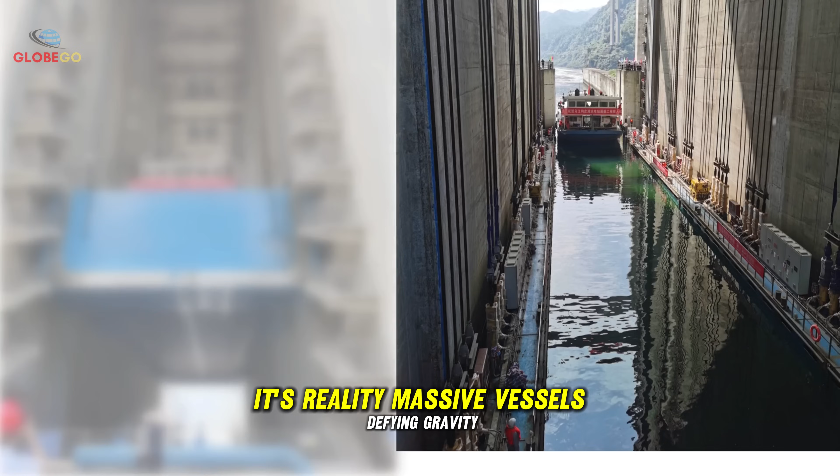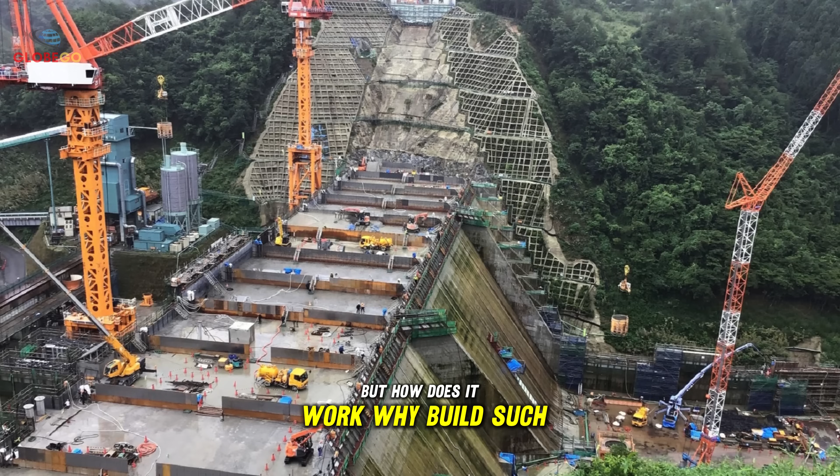What if ships could climb mountains? In one corner of China, that's not science fiction, it's reality. Massive vessels defying gravity rise hundreds of feet into the air, as if water itself flows uphill. But how does it work? Why build such a system? And what hidden technology makes the impossible possible? Let's explore. But before ships can climb mountains, we have to understand why China is uniquely positioned to make such feats possible.

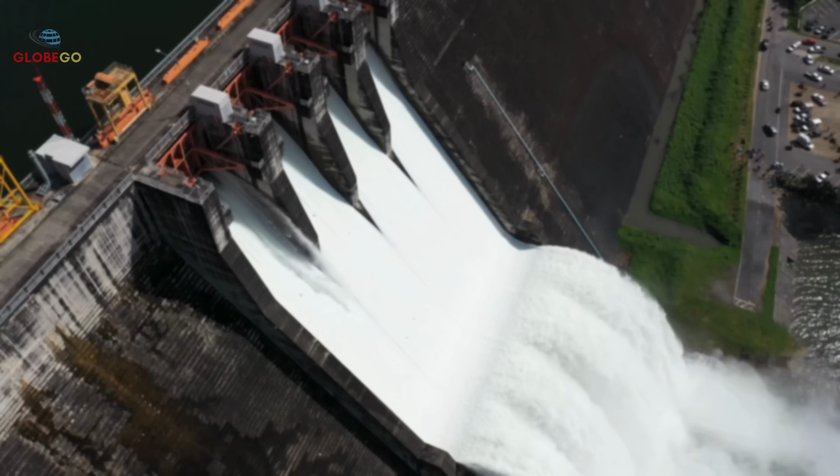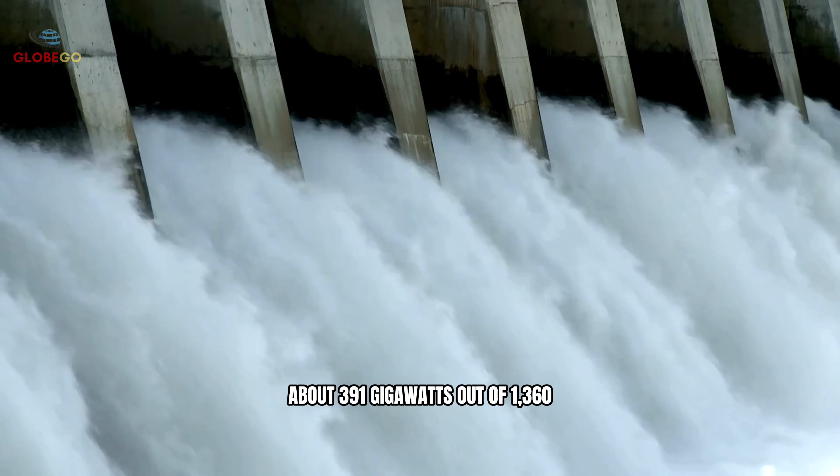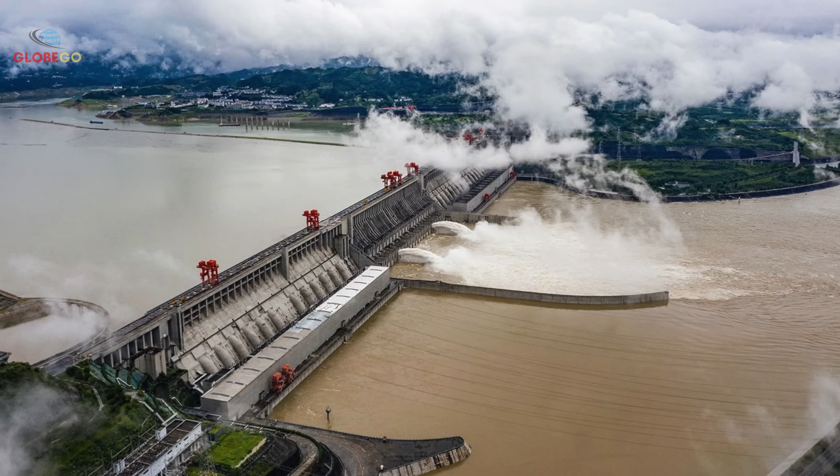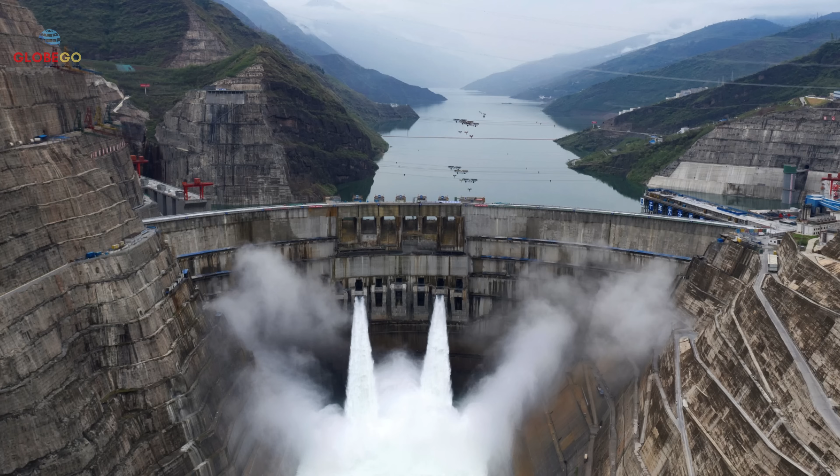In China, water is stacked, channeled, and pushed over mountains. It leads the world in hydropower, producing nearly 1/3 of global capacity, about 391 gigawatts out of 1,360. At the center of this power is the Three Gorges Dam, the largest hydropower station on Earth, generating 22.5 gigawatts. It spans the Yangtze River like a modern Great Wall, turning massive water force into energy. Close behind is the Beihetan Dam, the second largest in the world. The 5 biggest hydro stations are all in China.

But China isn't just building dams. It's transforming rivers into transport routes. Engineers are creating staircases that let ships float over mountains. This once seemed like science fiction, but it's real, and it's changing how goods, people, and energy move. China is not just building for today. It's shaping a future where mountains become ship highways and rivers power the nation.

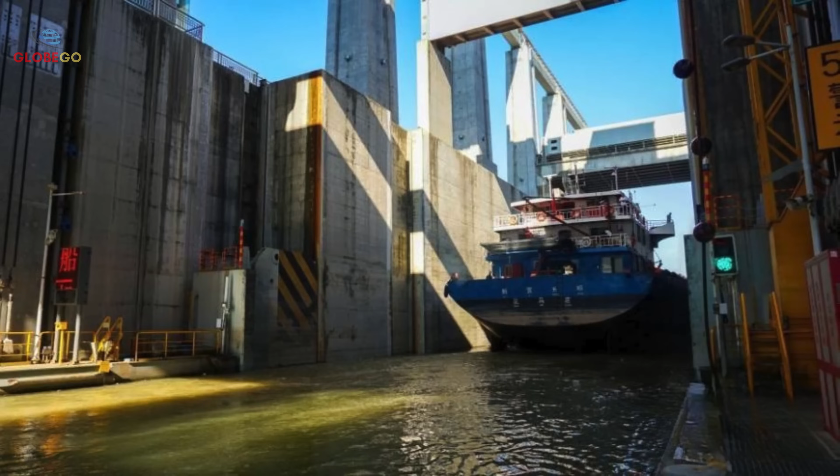So how exactly do ships rise through the mountains? The secret lies in an engineering breakthrough that looks straight out of a sci-fi film.

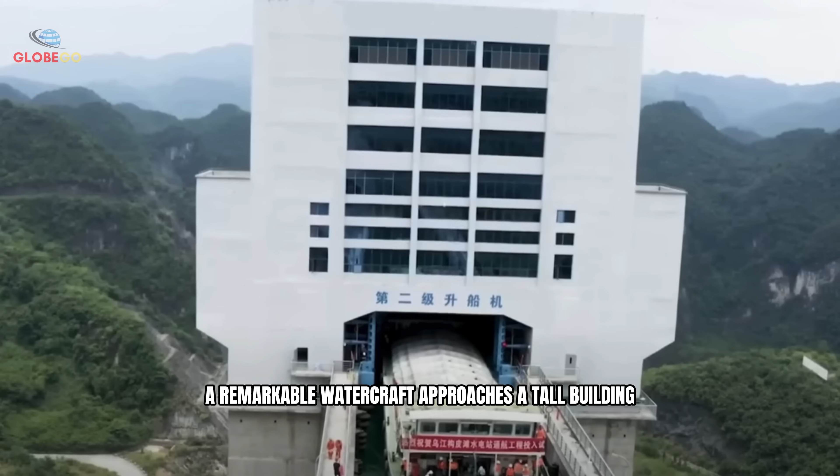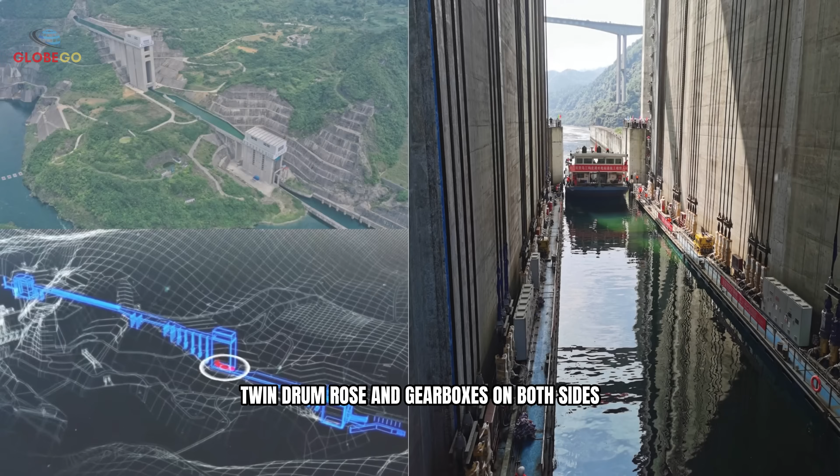Not far from the Goupitan Dam in China's Guizhou province, a remarkable watercraft approaches a tall building and enters it. While it may appear simple, the mechanism inside is complex, featuring a lift cable, twin drum rows, and gearboxes. On both sides, it functions much like an elevator in a high-rise building. Though the process might seem slow due to the scale and machinery involved, the system is highly efficient.

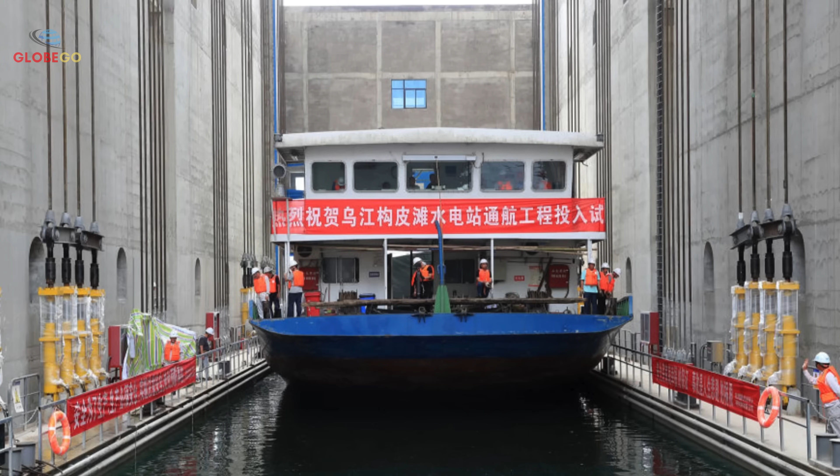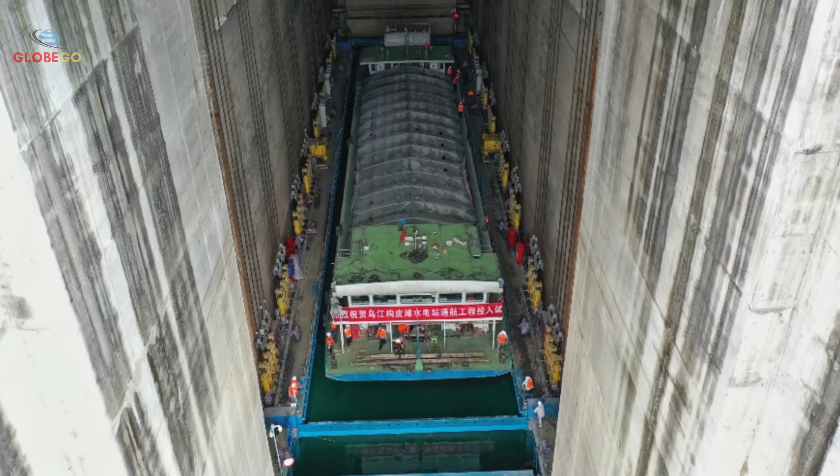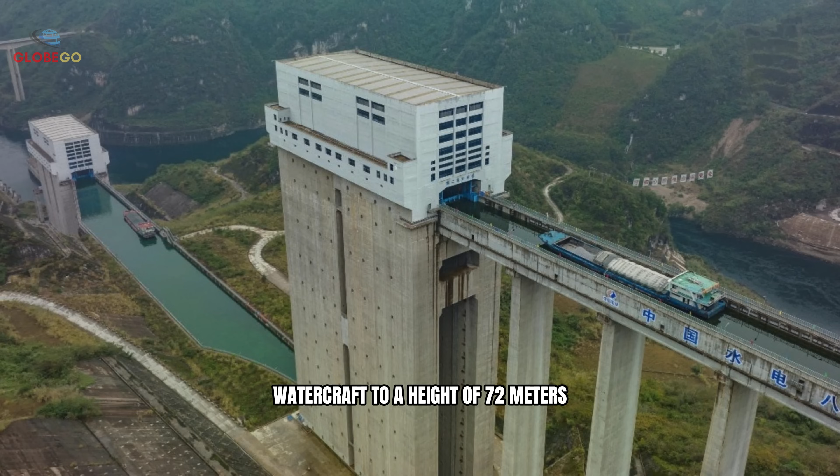According to its designers, the lift can raise or lower a 500-ton ship in about 10 minutes. In other words, a standard passenger ship can be elevated from its starting position in just minutes. The lift's maximum capacity is 1,800 tons, although heavier vessels take more time to move. Still, few would mind. This structure can lift watercraft to a height of 72 meters, depending on the water level. To put it in perspective, that's roughly the height of a 20-story building, an impressive engineering achievement by any standard.

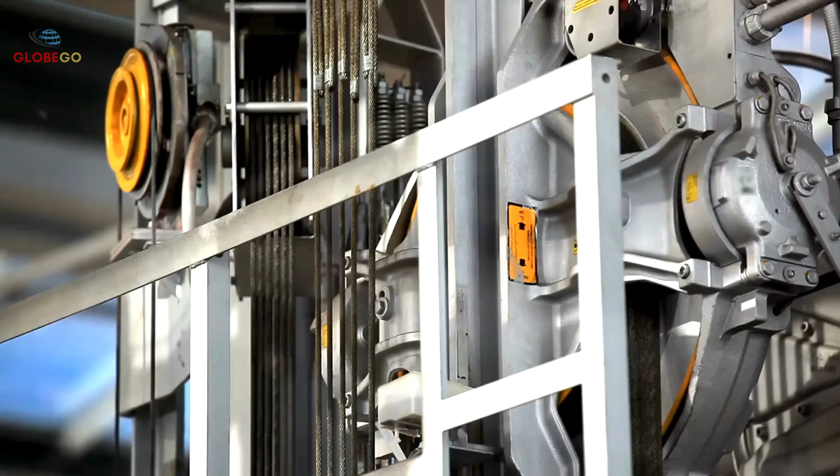But lifting ships once wasn't enough. What if a single lift couldn't do the job? That's where things get even more extraordinary.

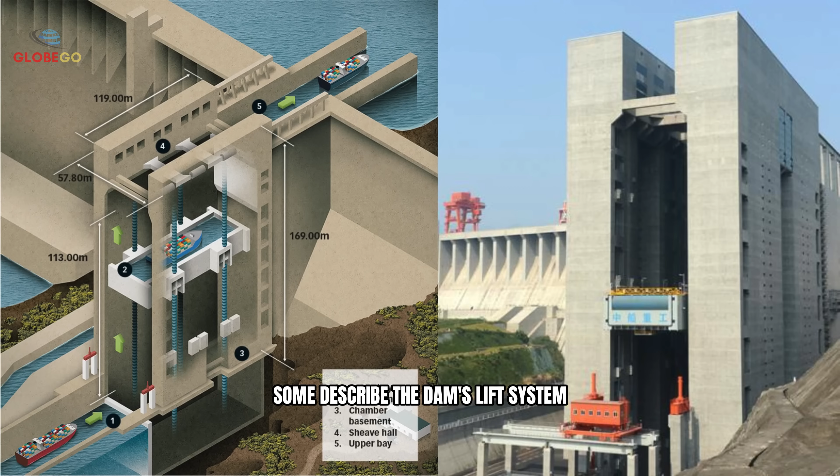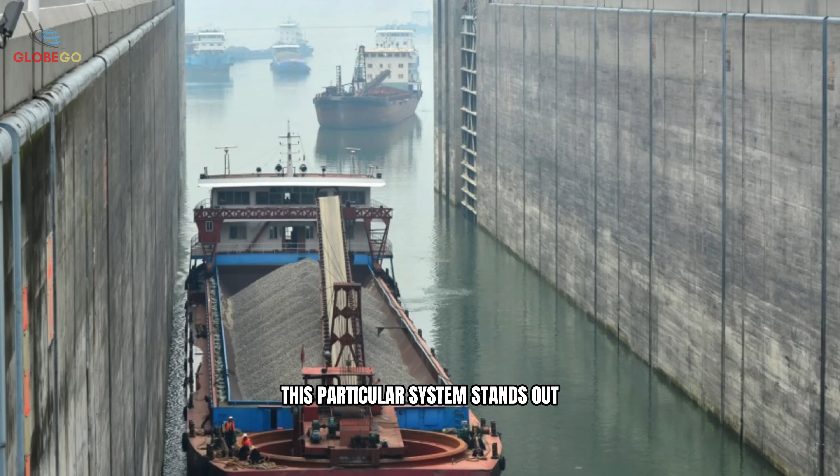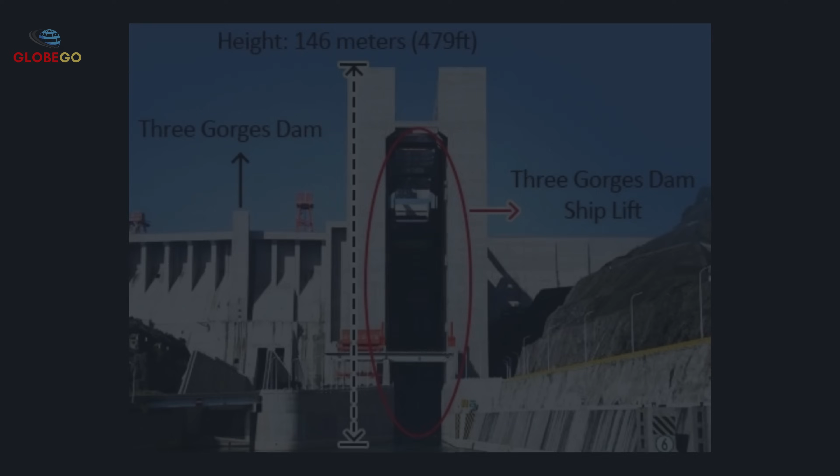Some describe the dam's lift system as a remarkable feat of engineering or even a modern marvel. While boat lifts have existed in different forms worldwide for years, this particular system stands out because it includes not just one, but 3 lifts. After the first lift, a second one raises vessels even higher, up to 127 meters. The mechanism is similar throughout. Ships float in, wait for the system to engage, and are then lifted by the dam's elevator system.

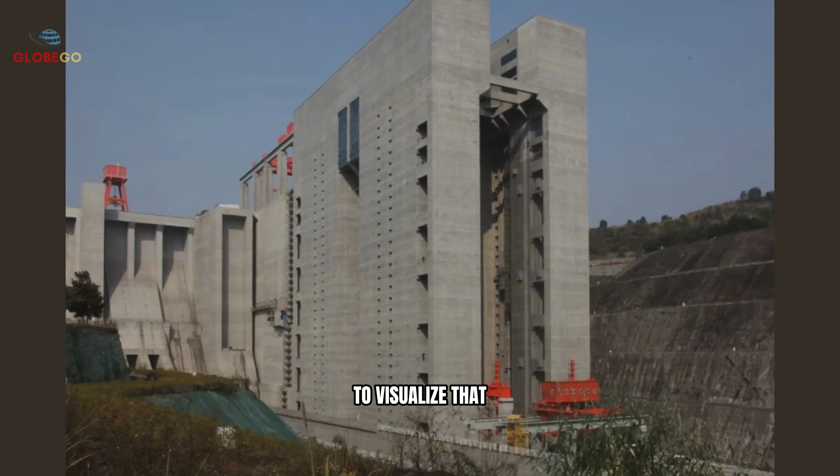Altogether, the watercraft rises a total of 199 meters. To visualize that, it's roughly the height of a 60-story building. That's well above iconic landmarks like the Great Pyramid of Giza, which stands at 139 meters, and even the Statue of Liberty, which is much shorter by comparison.

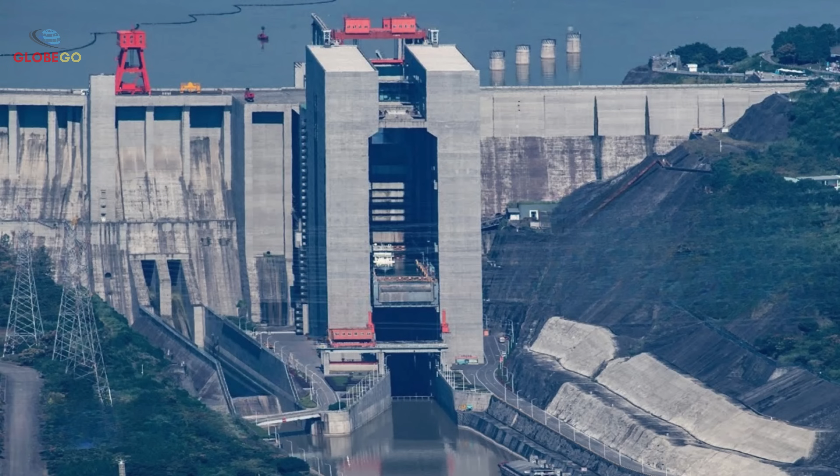After climbing the first 2 lifts, ships need to descend again to reach the water behind the dam. The system includes a final lift that lowers vessels by as much as 47 meters, depending on the water level.

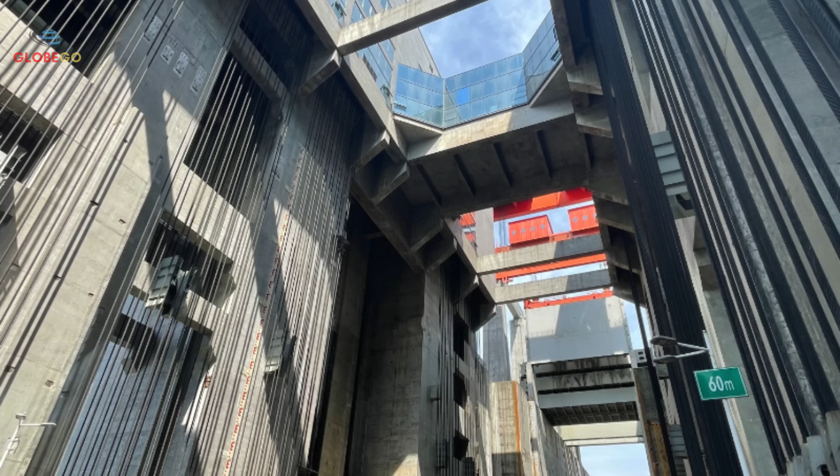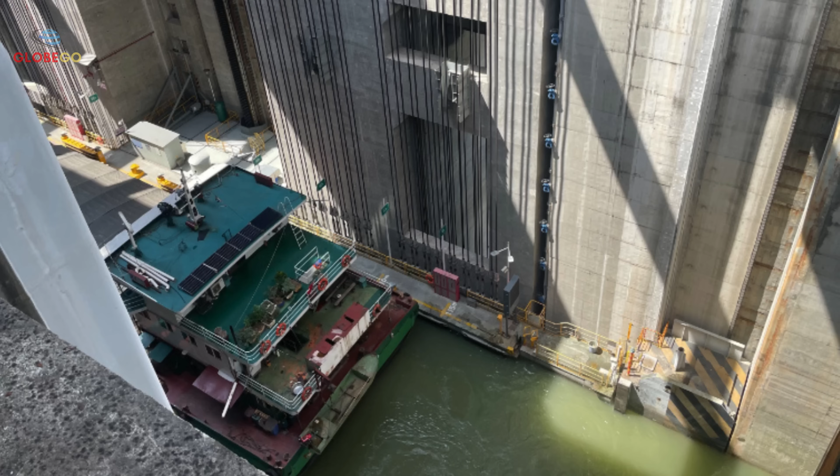Admittedly, this setup may not match the speed or flexibility of open river navigation. Only one boat can be lifted at a time, unlike free-flowing rivers where multiple watercraft can travel simultaneously. Still, the system allows for an efficient flow. As one vessel completes its lift, another can immediately follow. It's not a perfect substitute for open water routes, but engineers have optimized it as much as possible to keep traffic moving along this innovative passage.

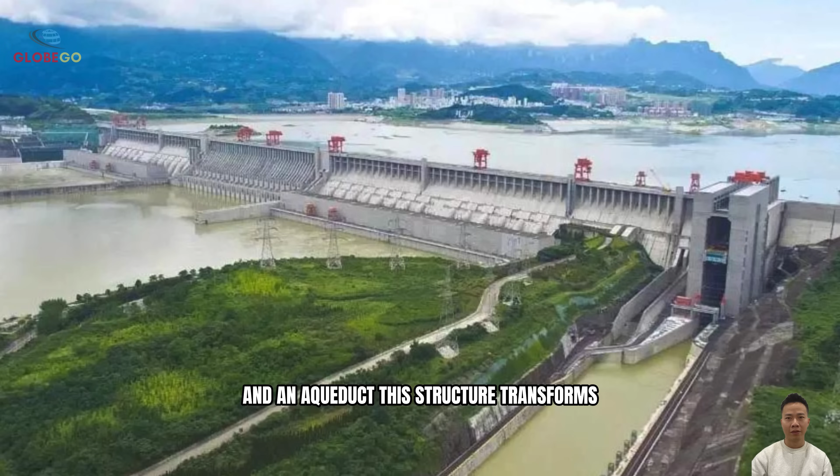Thanks to the combination of 3 lifts and an aqueduct, this structure transforms complex terrain into a manageable route, an impressive accomplishment in modern Chinese engineering. Now you might wonder, how do you link multiple lifts across rugged terrain without slowing everything down?

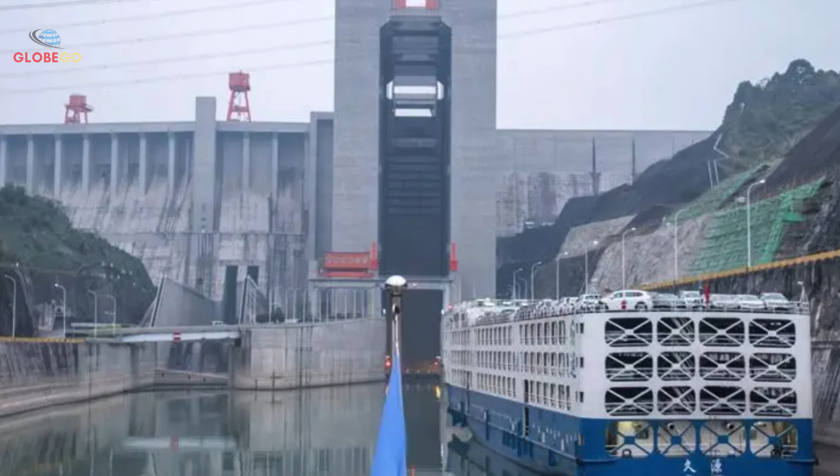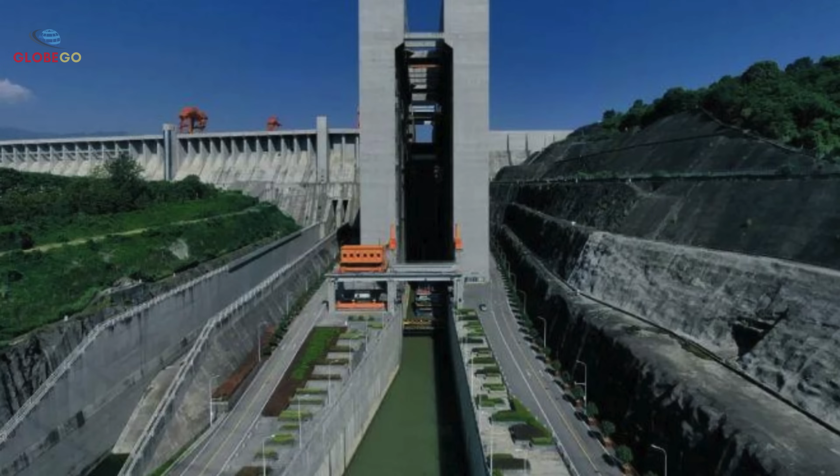However, there's a section between the lifts that had to be addressed. In many traditional waterway systems, this would typically be managed using locks. Locks help ships transition gradually between different heights without needing to scale mountainous terrain. With a series of locks, vessels can slowly rise or descend from one level to the next with minimal added infrastructure.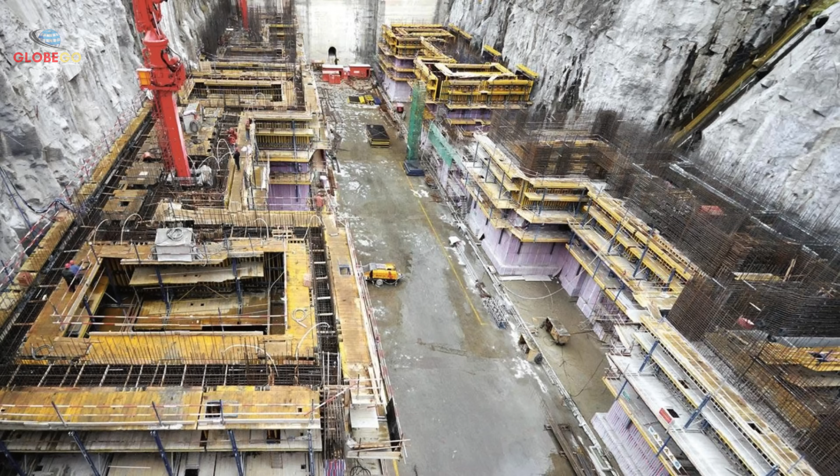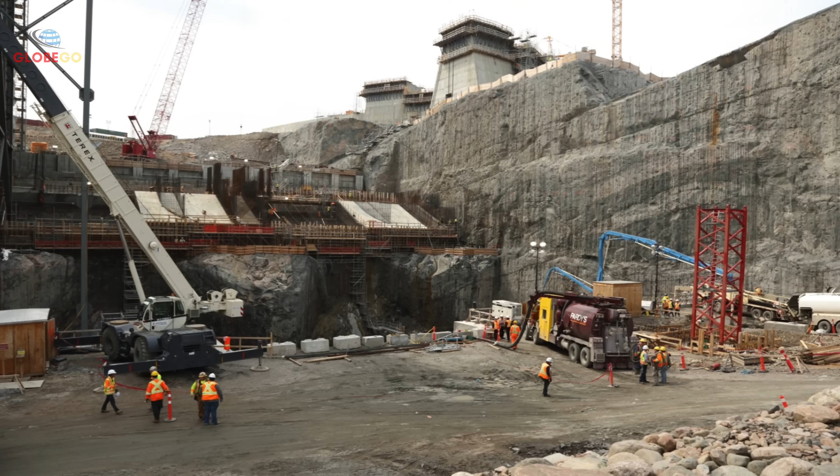But in this case, using locks alone wasn't feasible. Instead, engineers had to build a connection between the 3 lift systems. The solution was to construct an open aqueduct linking the lifts through mountainous terrain. While aqueducts have existed since ancient times, integrating one into a modern mountain shipping route required sophisticated planning and engineering. The lift system itself posed more challenges, but Chinese engineers handled it expertly. They completed a second segment of the route through the mountain by constructing a tunnel using advanced tunnel boring machines.

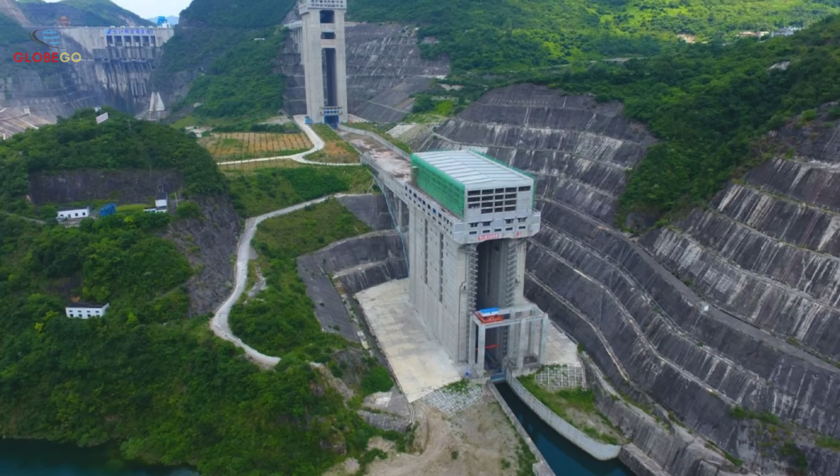The result is a continuous waterway that includes a 2.3-kilometer tunnel inside the mountain. The entire system cost approximately $777.5 million to complete. Now ships can safely and efficiently pass through this complex terrain, something that would have been far more difficult using

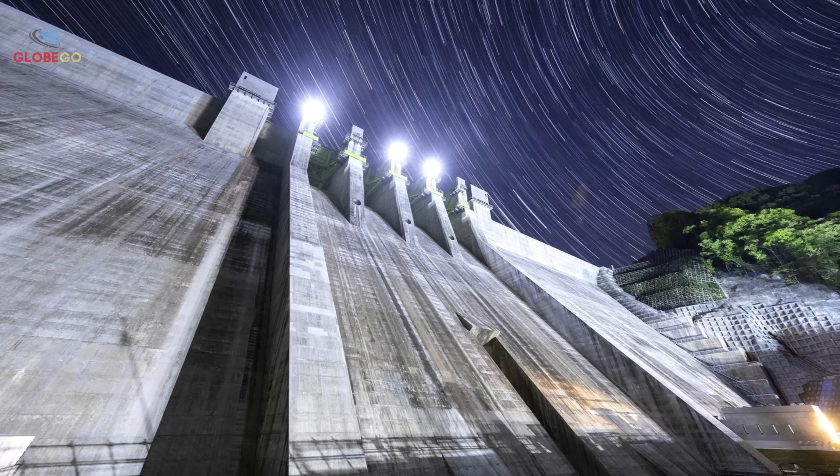only conventional methods. This innovative route was largely developed to support the Goupitan Dam project, which began construction in 2003 and has since become a major infrastructure feature in the area. Its most notable characteristic is that it's an arch dam, a structure known for strength and efficiency in mountainous settings.

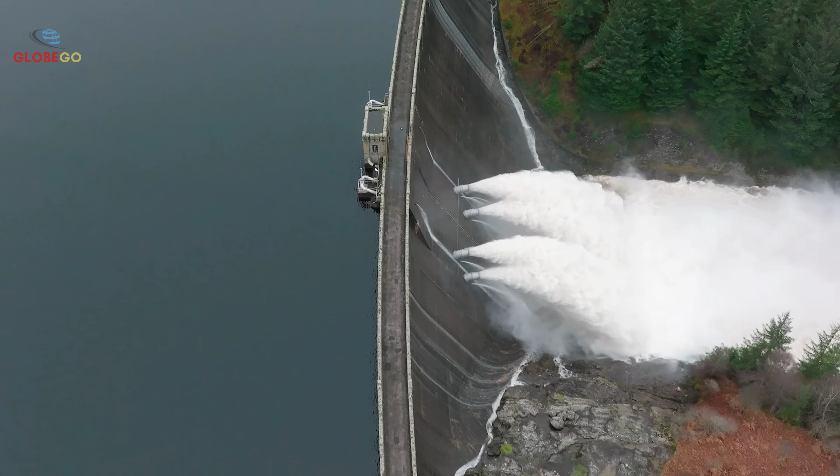But why go to such lengths? Was it just for convenience, or was the terrain too extreme to allow any other option?

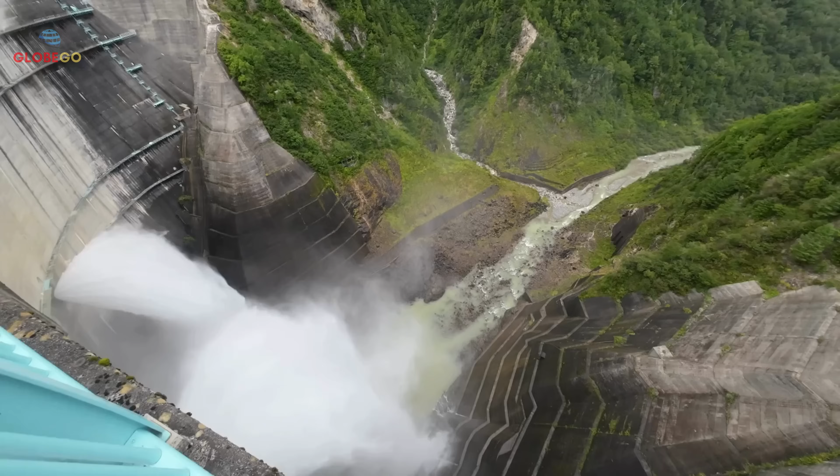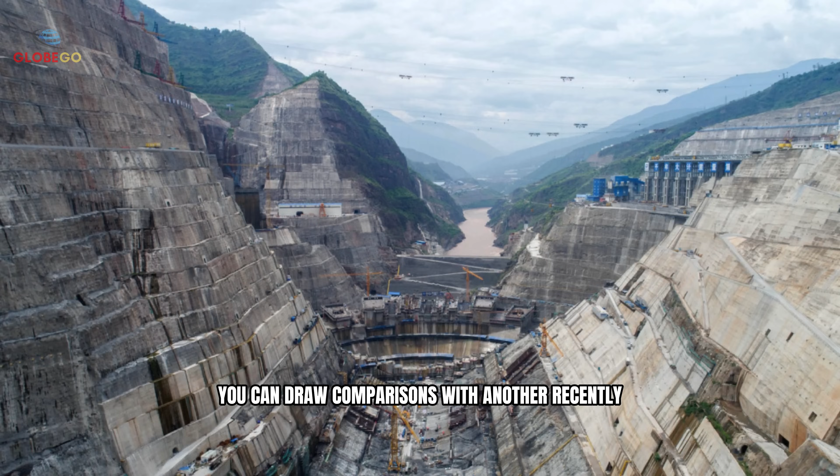You can draw comparisons with another recently built Chinese dam, the Baihetan, which shares a similar shape and is located in a comparable region. However, today's focus is on a smaller dam.

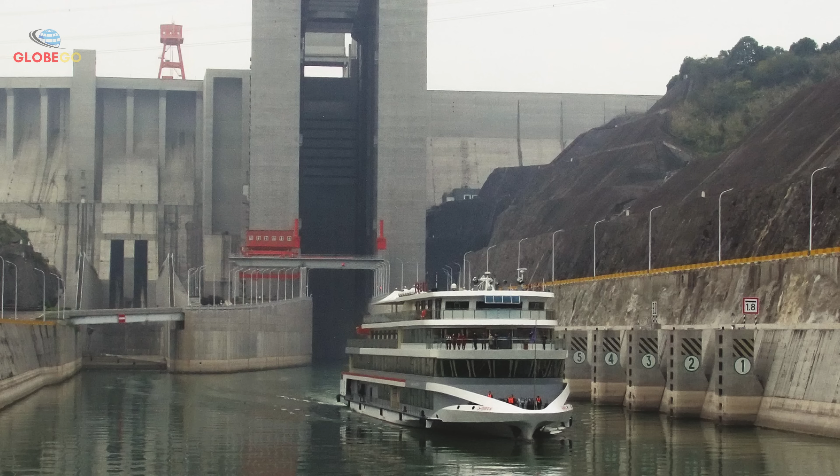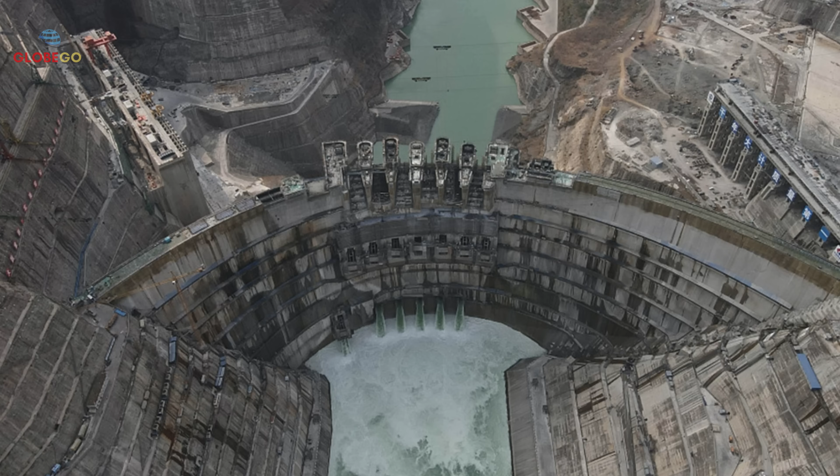This structure, featuring a unique navigation system, stands at 232.5 meters tall and spans 557.1 meters in length. In contrast, Baihetan reaches 289 meters in height and stretches 709 meters.

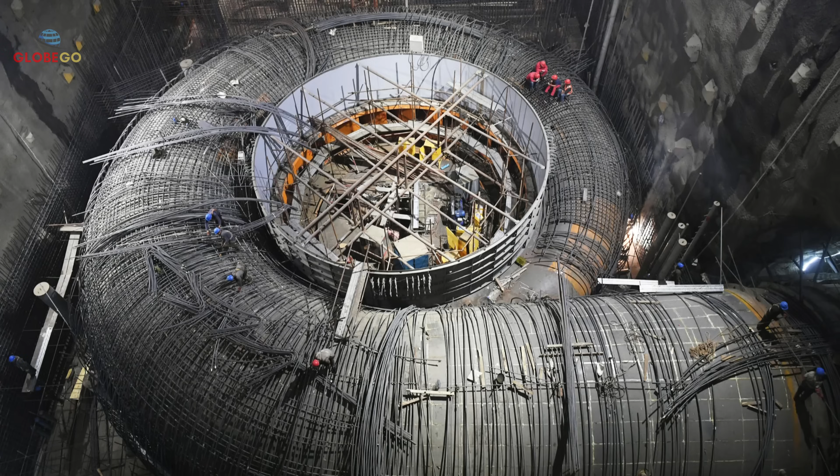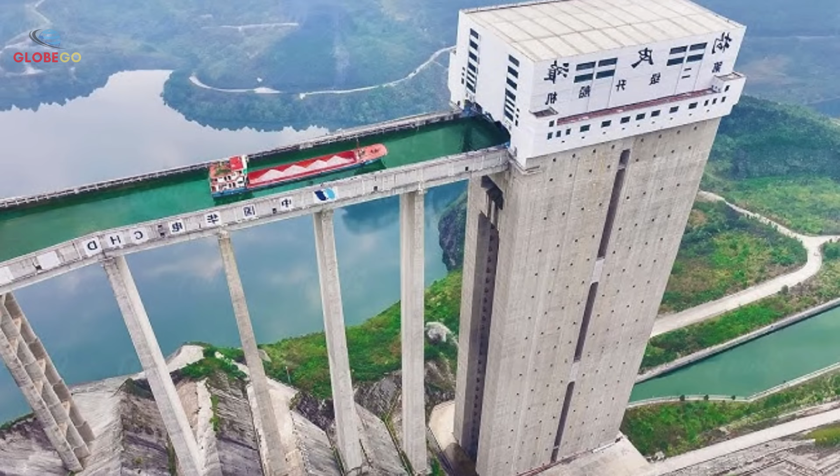Overall, these facilities may not be globally remarkable in terms of size or output, but the navigation system that allows boats to pass through mountainous terrain remains a notable innovation. This leads to the question: why invest so much time, effort, and funding into a project that doesn't stand out for its energy output alone?

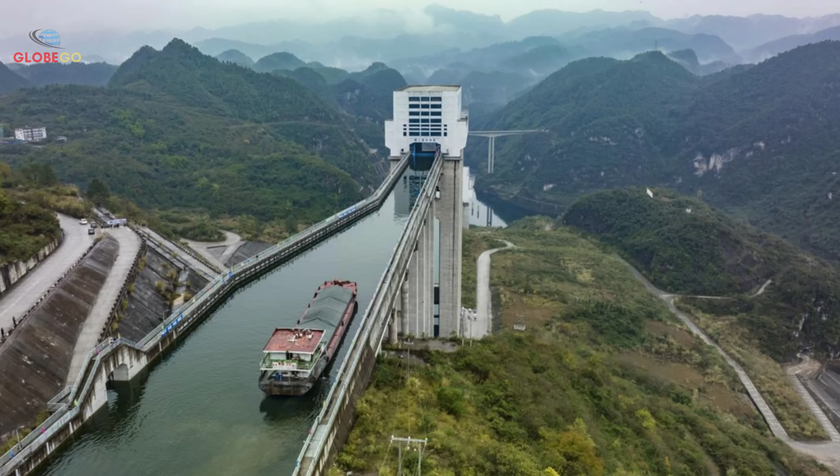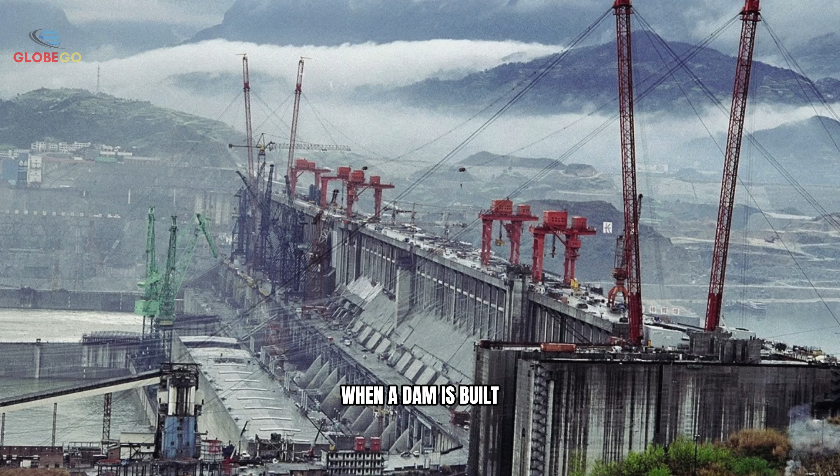A key reason lies in the dam's challenging geography. The site is so constrained and rugged that a traditional lock system was not feasible. When a dam is built, it naturally alters the river's flow, raising water levels on one side while restricting flow on the other. This creates a distinct height difference.

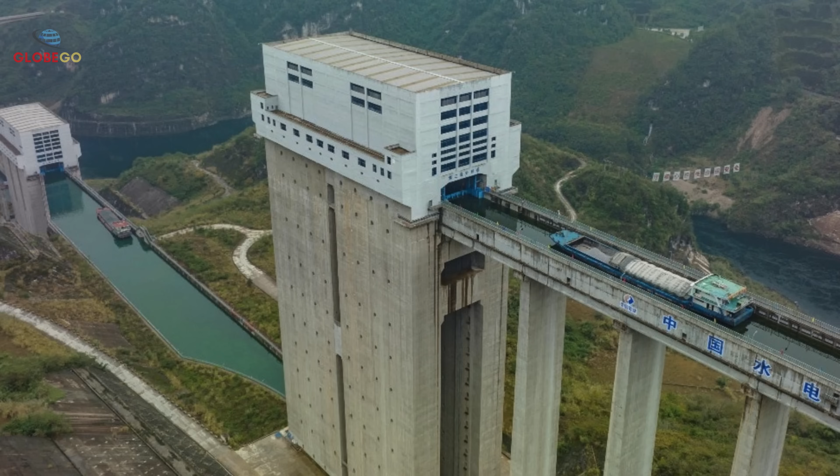While this elevation change may not always be extreme, in this case the difference was substantial enough that a single boat lift was impractical. Such a lift would have been too tall, slow, and potentially unsafe. As a result, a more complex system was necessary to navigate this terrain, highlighting the engineering challenge more than the dam's output figures alone.

To truly grasp the need for this solution, we have to zoom out into the mountains of Guizhou, where the stakes are as high as the elevation.

Guizhou Province, where the Wu River flows and features a dam equipped with a system of 3 boat lifts. The Yunnan-Guizhou Plateau, with an average elevation of about 1,000 meters, includes a landscape made up of plateaus, mountains, hills, and basins. Roughly 92.5% of the area is rugged and mountainous, making it difficult to establish efficient transport infrastructure.

Numerous rivers run through this region, so when a dam is built, navigation often becomes a significant challenge, prompting the use of innovative solutions like triple lift systems.

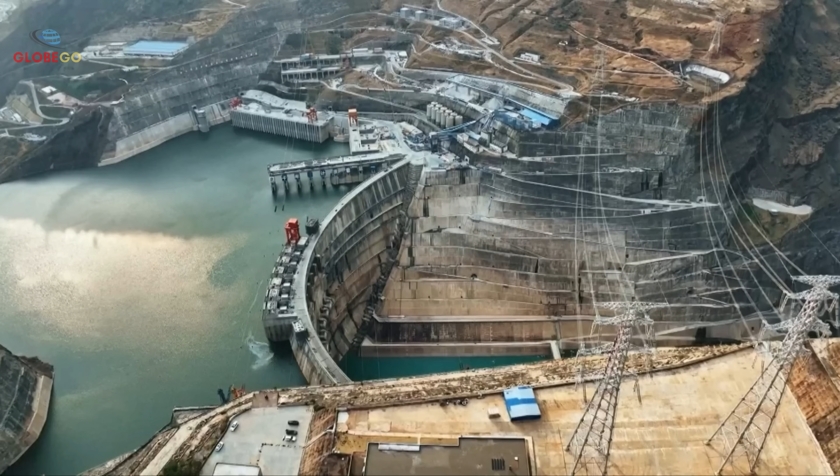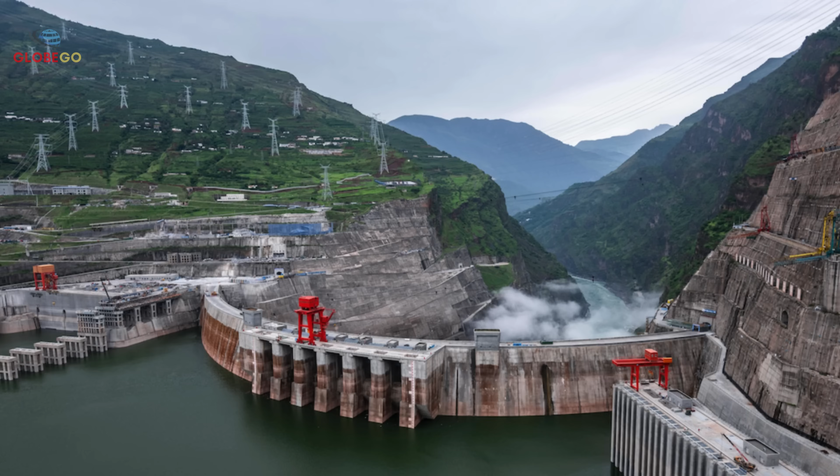At first glance, building a dam in this location might seem impractical due to the terrain. However, this impression changes when considering the region's untapped hydropower potential. Guizhou holds an estimated 18,745 megawatts of hydropower resources, ranking 6th in China.

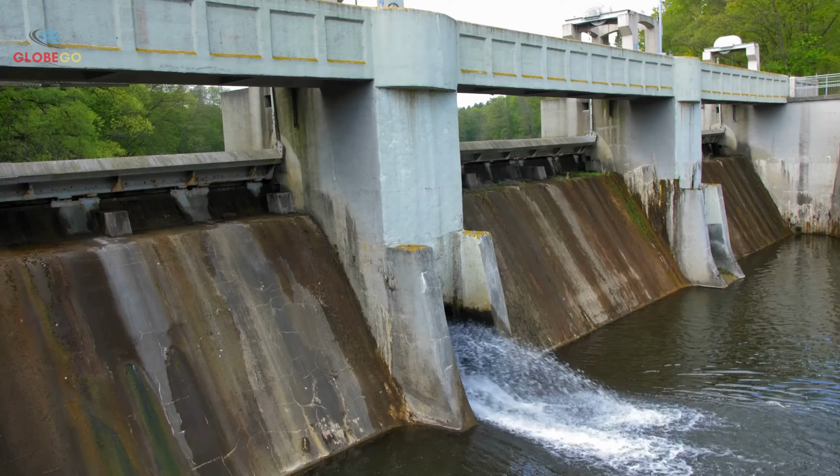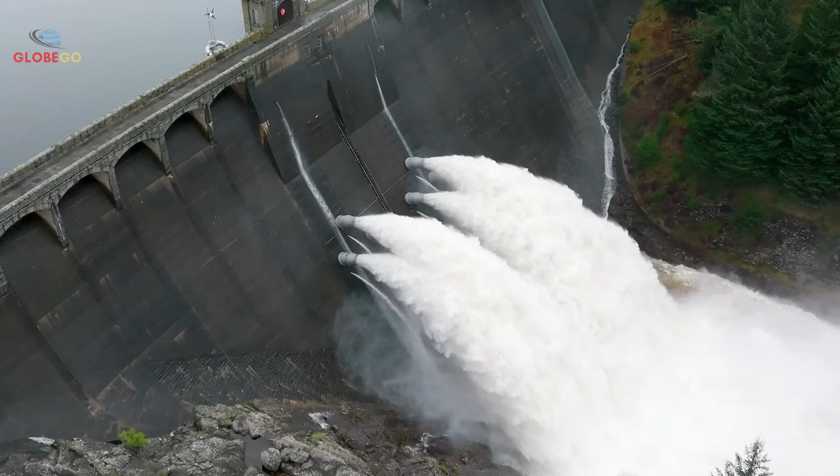Because of this, the provincial government is actively working to develop these natural energy assets. There are currently 8 hydropower stations along the Wu River, contributing to a combined capacity of approximately 8,500 megawatts. This level of capacity has become a strategic priority. The leadership recognized the potential of the site and invested in hydropower infrastructure accordingly.

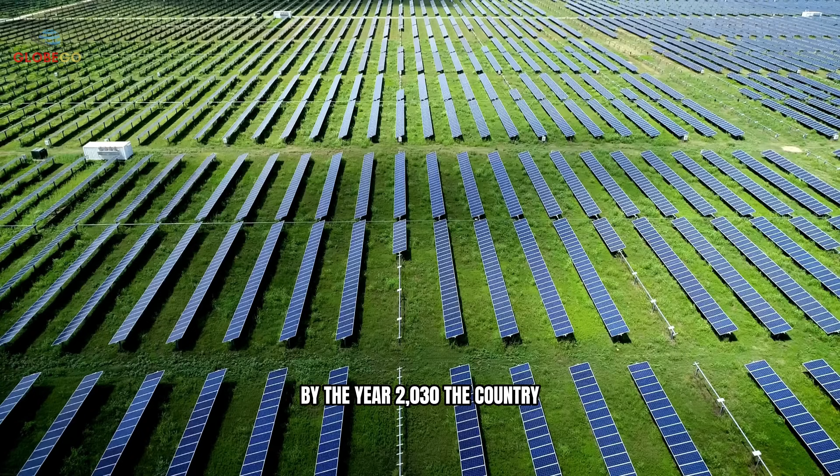This effort aligns with China's national energy policy, which emphasizes expanding green energy. By the year 2030, the country aims to significantly increase its share of renewable energy, and by 2035, it expects renewables to form a major part of the overall energy mix. In this context, Guizhou's rivers are key contributors to the national plan.

As the longest river to flow entirely within a single country, it drains about 1/5 of China's territory. Nearly 1/3 of China's population lives near it, and the Yangtze River Delta accounts for about 20% of the nation's GDP, highlighting the immense importance of this waterway.

But is it all worth it? What makes this water-based system so vital in comparison to roads or railways?

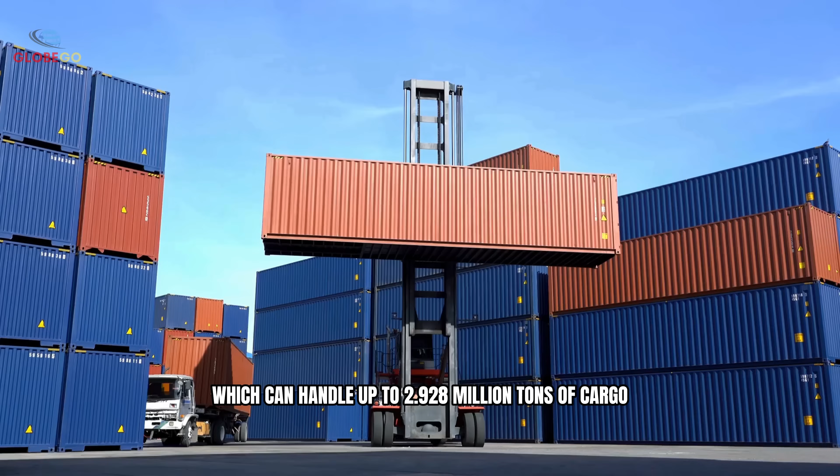China has developed an extensive transport network, not only for passengers but also for freight. Regions that are not yet fully connected are looking to join this expanding infrastructure. Guizhou Province has a unique opportunity thanks to the Wu River, a major tributary that supports regional integration through water-based transport. A key component of this development is the Guizhou lift system, which can handle up to 2.928 million tons of cargo annually.

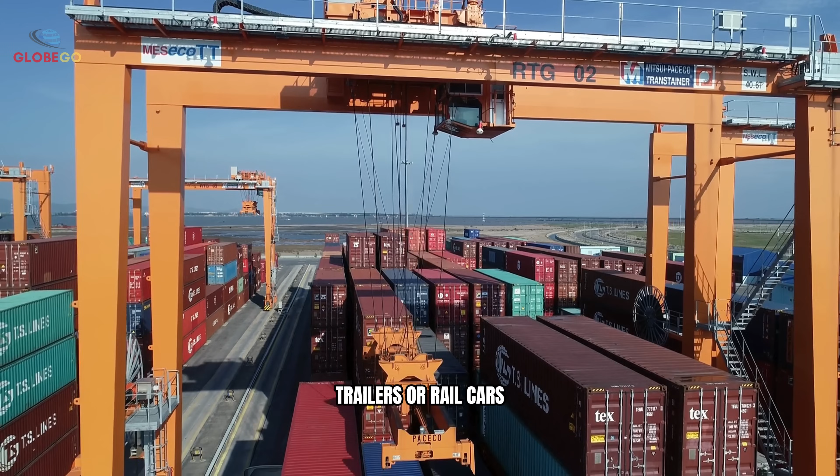This capacity significantly enhances freight movement in the region. While goods can be transported using semi-trailers or rail cars, these methods are often less efficient. For example, a typical truck carries about 22 to 25 tons, let's assume an average of 23 tons. In contrast, a single vessel lifted by the system can carry around 100 tons, and that's not even the maximum limit. A single barge can replace dozens of trucks, offering a more scalable and sustainable solution.

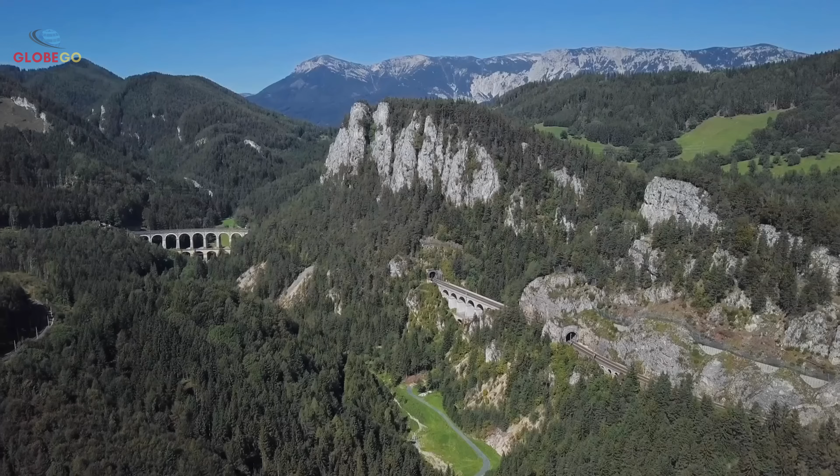Transporting goods by road in Guizhou's mountainous terrain presents major challenges. The narrow roads and bridges make it difficult, if not impossible, to build wide routes that accommodate both heavy trucks and regular vehicles. Allowing trucks to navigate these paths can lead to significant logistical and safety concerns. Water-based transport provides a practical alternative. Barges and cargo ships are also more fuel-efficient than trains. Constructing rail infrastructure through mountainous areas can be technically demanding and costly. While trains have their advantages, in terms of overall efficiency and flexibility in such rugged regions, water transport offers compelling benefits. And while this system is impressive, it's not even the biggest or boldest.

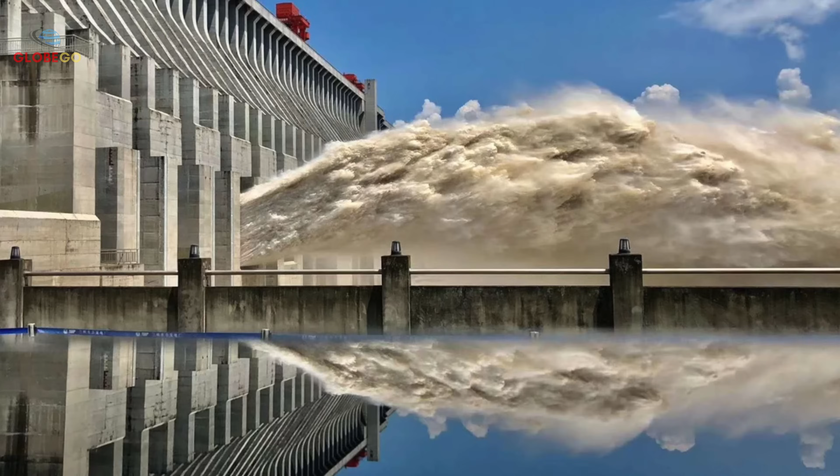Wait until you see what's happening at the legendary Three Gorges Dam.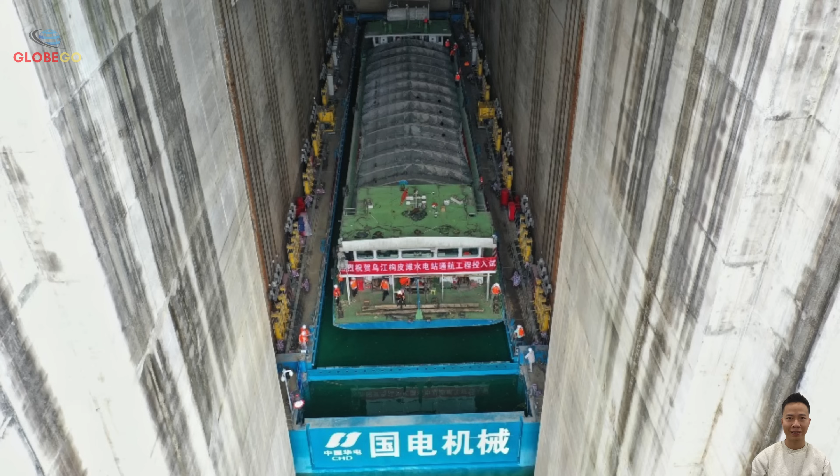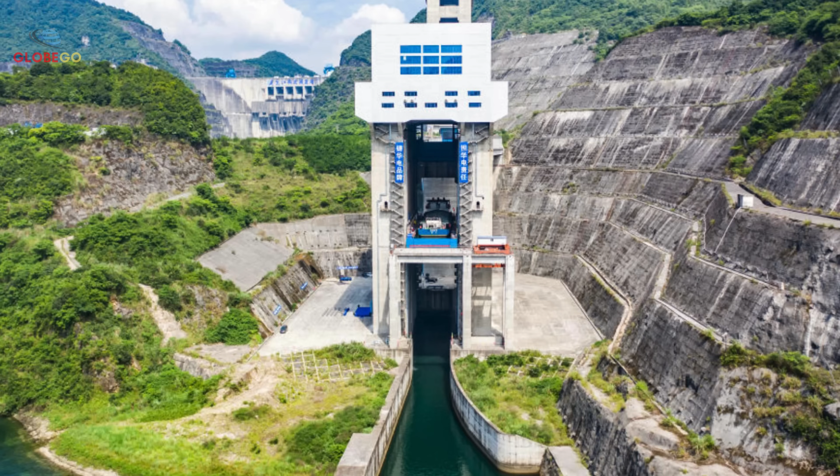Despite the challenges and high cost associated with constructing the ship lift, the region has achieved an effective and innovative solution. We now have a remarkable example of engineering, a ship lift that enables vessels to travel over mountainous terrain, something once thought nearly impossible. These lifts, capable of raising vessels weighing up to 1,800 tons, represent a major technical accomplishment. And that's not even the largest system in China. The Three Gorges Dam features an even more powerful lift, with a capacity of approximately 3,000 tons, one of the highest performing ship lifts in the world.

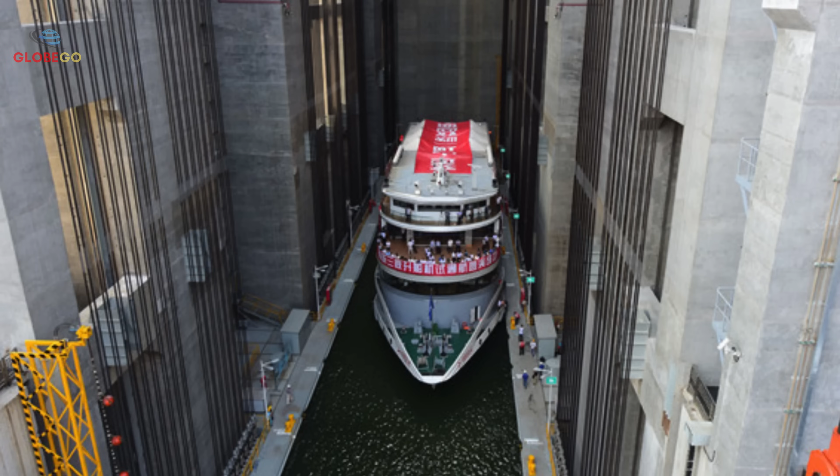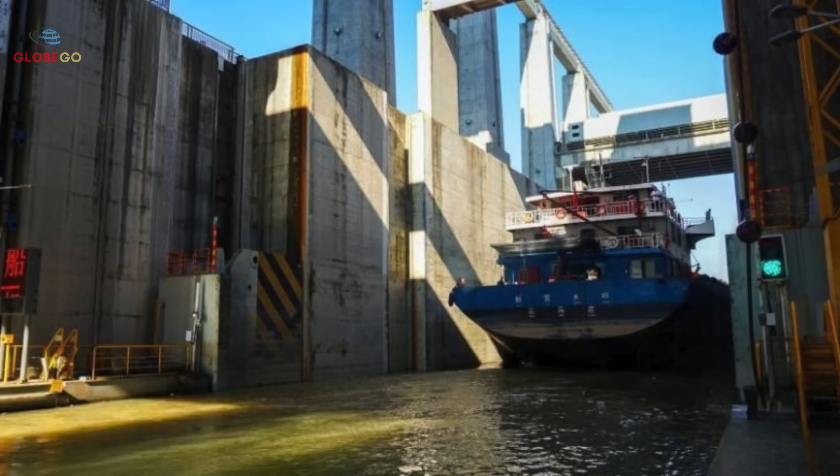These large-scale lifts bring enormous capabilities. For example, the elevator platform can carry a ship pool roughly 122 meters long and about 18.3 meters wide, approximately equivalent to the volume of 4 Olympic-sized swimming pools. The lift can raise the chamber to a height of 113 meters, allowing it to transport both standard vessels and large cargo loads. Although it's not the fastest system, taking about 40 minutes to complete a single lift, it still performs an extraordinary task, raising extremely heavy vessels to significant heights with just one chamber.

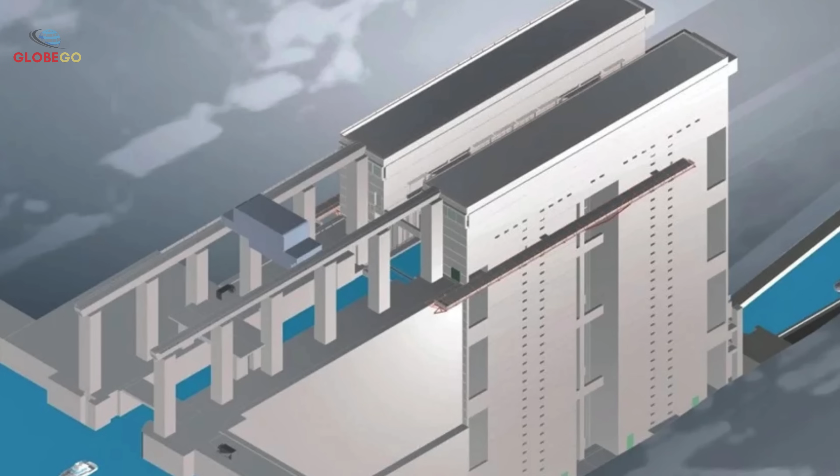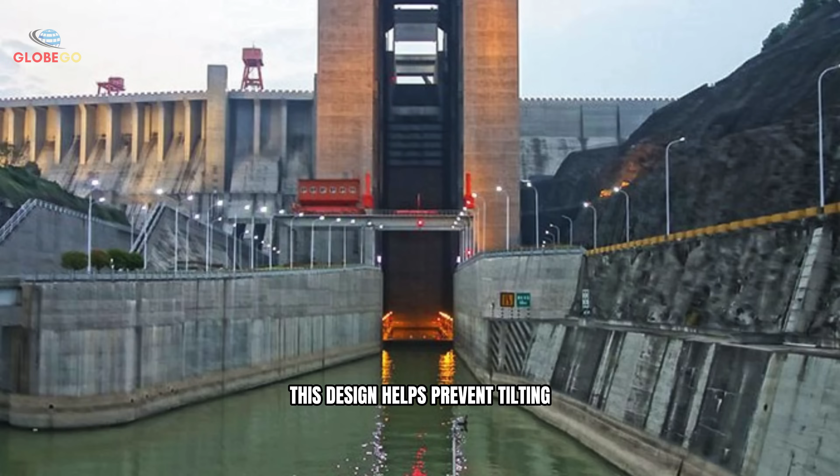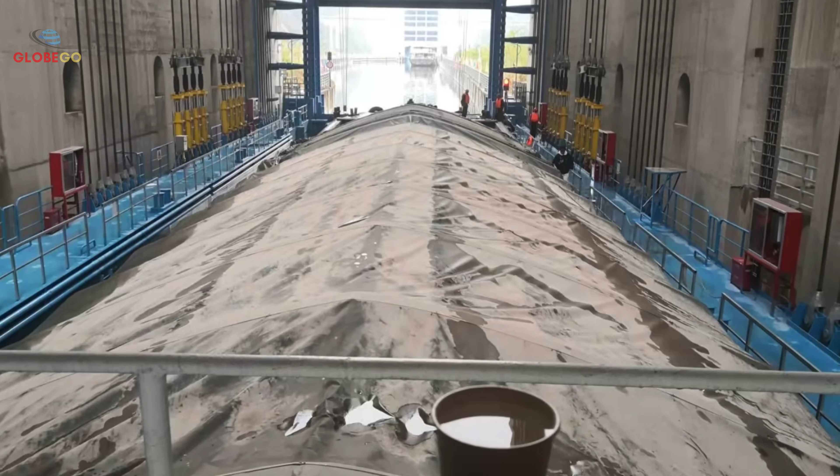The engineering behind the system includes several safety features. 4 sets of drive mechanisms, symmetrically arranged, stabilize the chamber at 4 corners. This design helps prevent tilting or imbalances caused by water movement within the chamber and significantly reduces tipping risk. In addition, the lift is designed to withstand emergencies, including earthquakes. Shock-absorbing components are built into the structure, helping to dissipate vibrations and direct seismic forces into structural columns, minimizing the risk of damage or collapse.

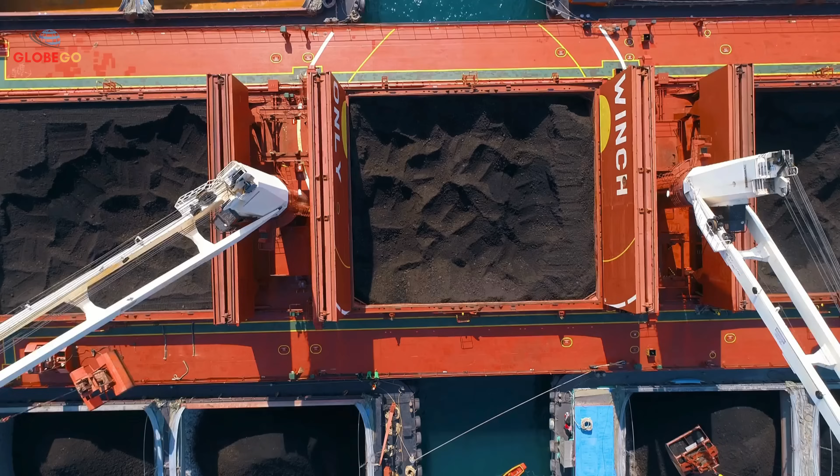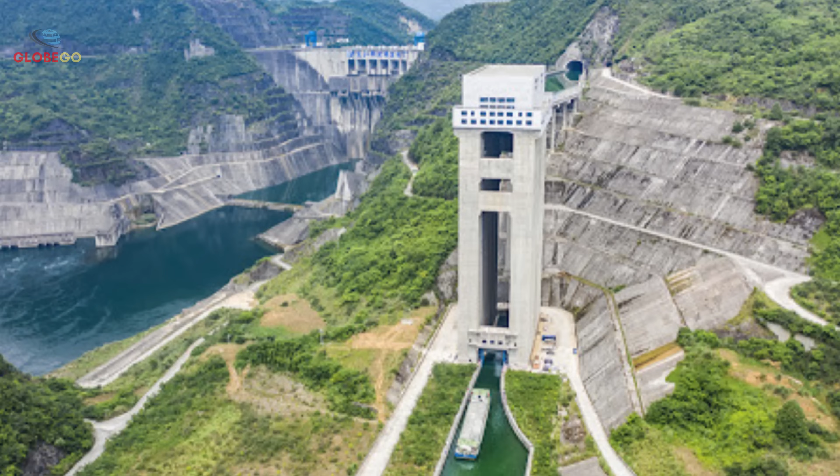Since its installation, the lift has delivered positive outcomes. According to the Three Gorges Navigation Authority, the dam's throughput during the first half of 2023 reached 84.1 million tons, an increase of 9.32% over the previous year, setting a new historical record. So what does this all mean? Why should we care about ships sailing up mountains and massive elevators hidden in the hills?

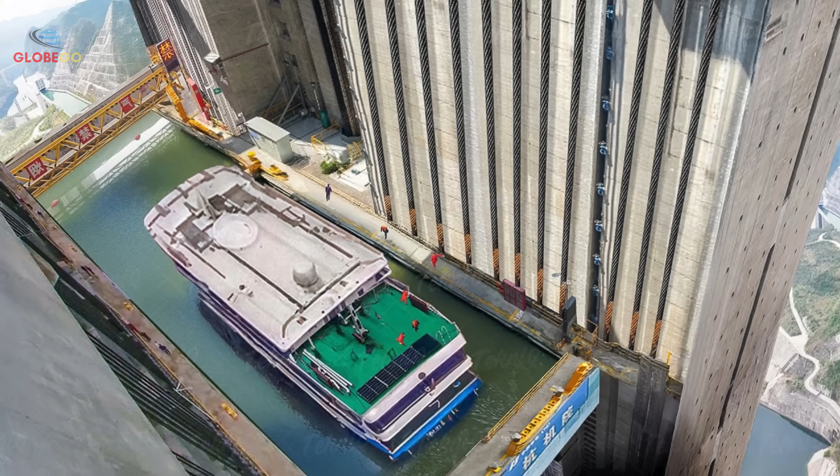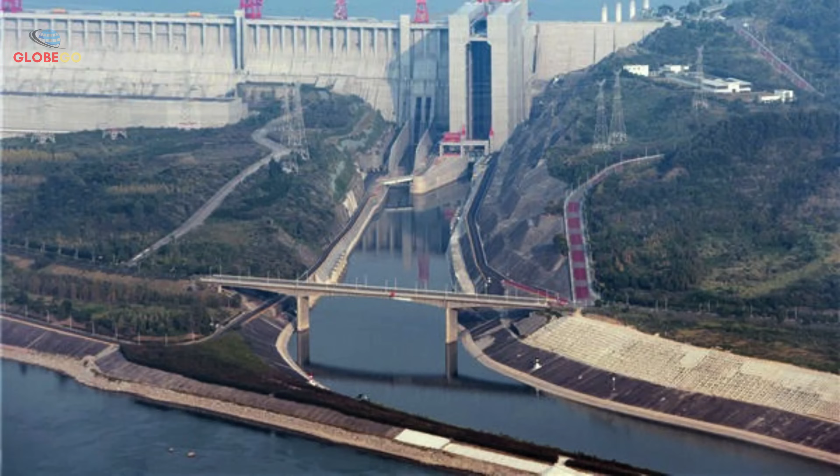Before the Three Gorges Dam elevator was built, ships used a system of 2 five-step locks beside the dam. Passing through them took about 4 hours. China built an elevator that lifts vessels in just 40 minutes to save time. This upgrade helps boost transport efficiency on the Yangtze River, a key waterway for China's economy. Each lock chamber is about 280 meters long, 35 meters wide, and 5 meters deep, holding vessels up to 10,000 tons. The locks have played a major role in growing regional trade. While they were expected to handle up to 100 million tons a year, they have already exceeded that.

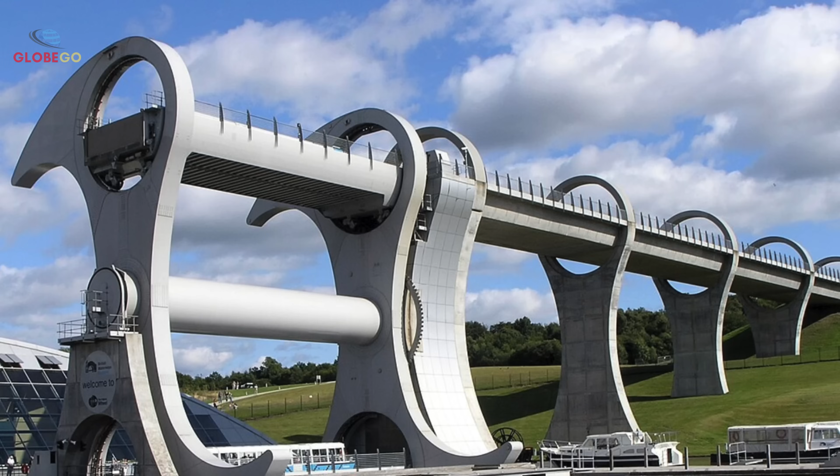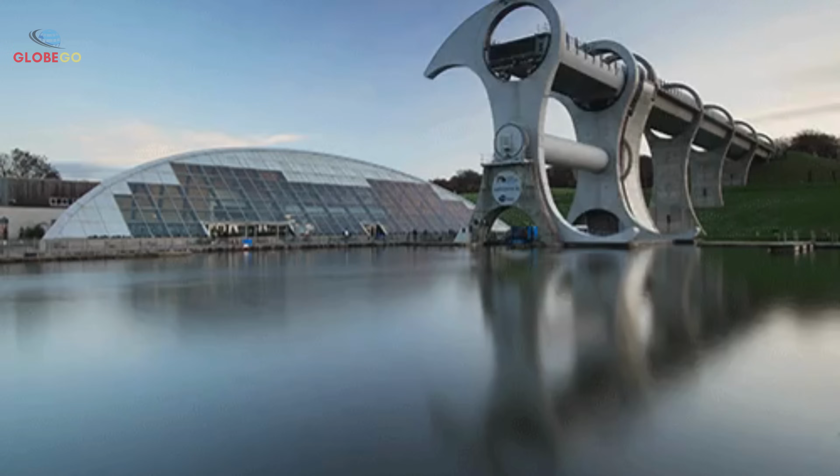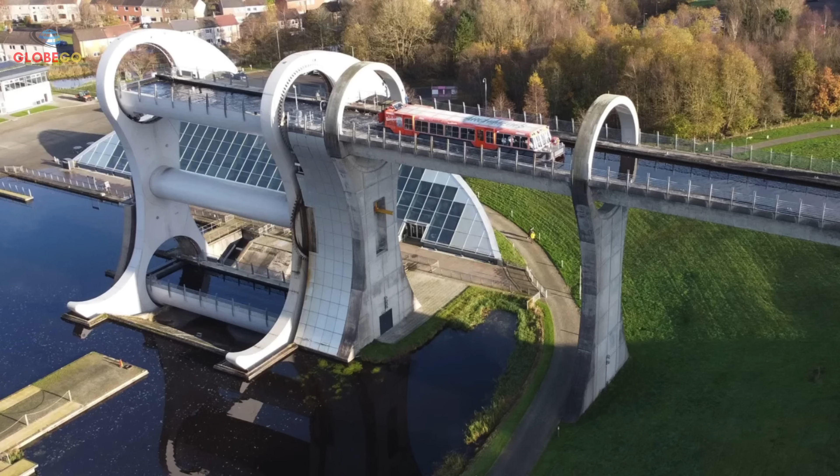A similar innovation appeared in Scotland with the Falkirk wheel. Built in 2002, it reconnected 2 major canals separated for nearly 70 years. The final design, shaped like a Celtic axe, a ship's screw, and a whale's ribcage, uses 2 gondolas, each holding 300 tons of water, to lift up to 600 tons. The gondolas stay balanced because boats displace their weight in water, making the system very energy efficient. It runs on about the same power needed to boil 8 kettles of water.